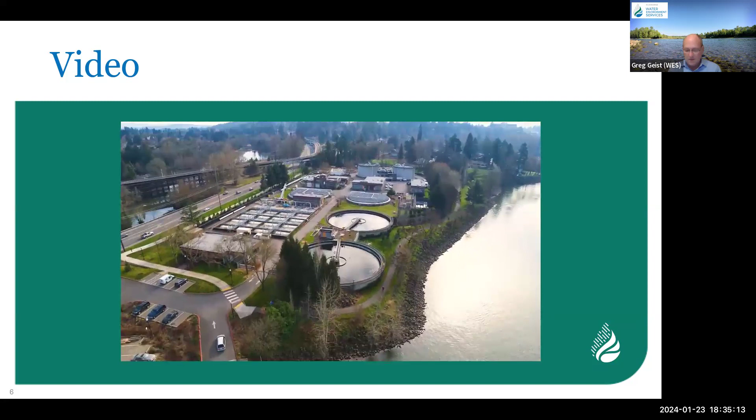We don't call our facilities sewage treatment plants. We call them water resource recovery facilities because that's what they do. They make clean water, that's very important. They also make energy, electricity, with what goes down your toilet. And we make fertilizer that we can use out on agricultural fields. People expect clean water, they have high expectations around that. And the idea that we can help protect that, and that's our job, how lucky can a guy get to have that be your job?

All right, thank you. I do feel very grateful to be able to do what we do for the community. I want to read our vision. We have a vision and a mission statement for WES. Our vision is to be a collaborative partner in building a resilient clean water future where all people benefit and rivers thrive. As I mentioned in the video, it's all about connecting with the community and understanding what their needs are and what their values are. I'll go ahead and let you read the mission statement.

But as I alluded to in the video, we don't just do wastewater. This is a wastewater conveyance project, which means pipes in the ground that get wastewater to our treatment plant for it to be treated and do all the great things that we do there. But we also do habitat restoration in our community and manage stormwater runoff.

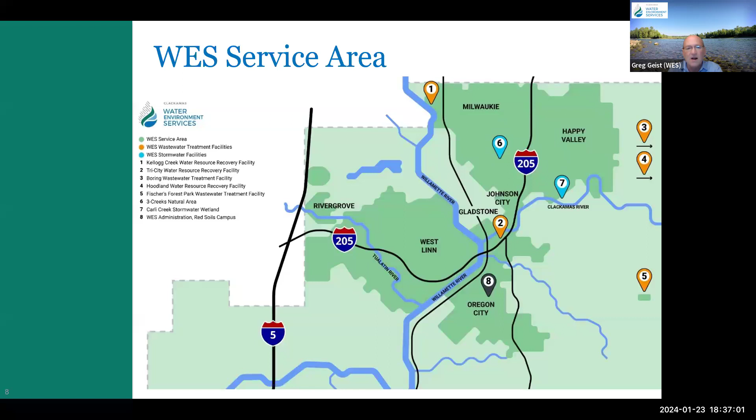Next slide, please. And this is the area that we serve. This is our service area in the dark green there. Everything from Milwaukie out to the far reaches of Happy Valley and south down to Oregon City, West Linn, and Gladstone. We serve about 200,000 people, and we treat about 7 billion gallons of wastewater every year. It's pretty remarkable.

Next slide, please. So the project that we're talking about tonight, I think we need to give it some context. It's one project of many that we are working on. We base our projects on plans. As you can see, since 2017, we've done a number of what we call master plans or facilities plans that take a look at our facilities, the condition and the need for future expansion, amongst other things. We develop a 5-year capital improvement plan, or CIP, based on the needs identified in those various plans. This particular project came from our 2019 sanitary system master plan that identified future growth in Happy Valley, as well as some older infrastructure that needs to be replaced. And so that's what we're proposing with this project.

Next slide, please. And again, as I mentioned, our 5-year capital improvement plan, which is really the infrastructure projects that we intend to construct, build, and operate over the next 5 years, has a couple different components. Part of it is capacity. This project is about future growth, but the other part is reliability. When you look at the overall amount of money that we're going to spend over the next 5 years, between the projects that deal with capacity, that's about 40% of our allocated expenses, and the reliability piece is about 60%. So we have infrastructure that's been in place for many, many decades, and that reliability piece is also very important.

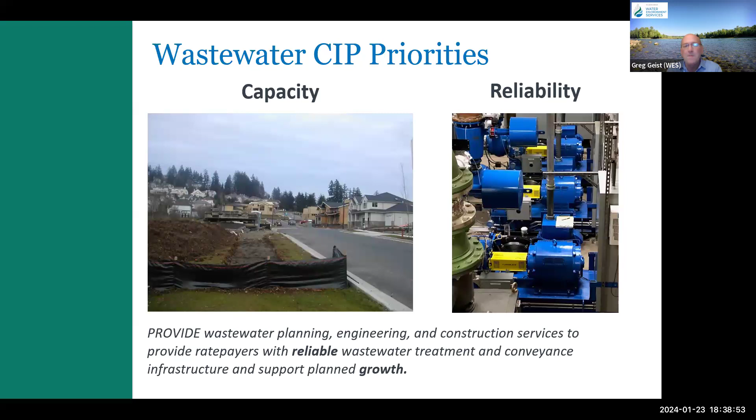Next slide, please. And along those lines, we do a lot of thoughtful planning. We have our 5-year capital improvement plan, you can see the bubble on the left. We also have an annual capital budget. We have a long-term financial plan and a rate forecast. Our goal is to have reasonable and predictable rate increases over time in order to provide both the reliability and the future capacity that we are trying to provide.

And again, if you look, we have stakeholder input loops throughout our process. We have the Board of County Commissioners, which is the governing body of Water Environment Services. They're the ones that approve our 5-year capital improvement plan, and they approve our annual budget and rates that are necessary to fund the overall capital improvement plan, and this project in particular. Next slide, and I'll hand it off to Jeff to talk more about the details of the project. Thank you very much, Greg. Next slide.

So we'll start off with what is the Outfall project? The treated water from the Tri-City Water Resource Recovery Facility is called effluent. This treated water, or effluent, is sent to the Willamette River through an outfall pipeline. This pipeline has diffusers at the discharge location that are designed to maximize mixing of our plant water into the river. This mixing and dilution is carefully engineered as an important component to meeting the state water quality standards, helping improve our rivers for boating, swimming, fishing, and aquatic resources. As someone who enjoys exploring our rivers, I think this is very important for me personally, and also a very important aspect of this project. The project overall will consist of building a 90-inch diameter, which is 7.5 feet.

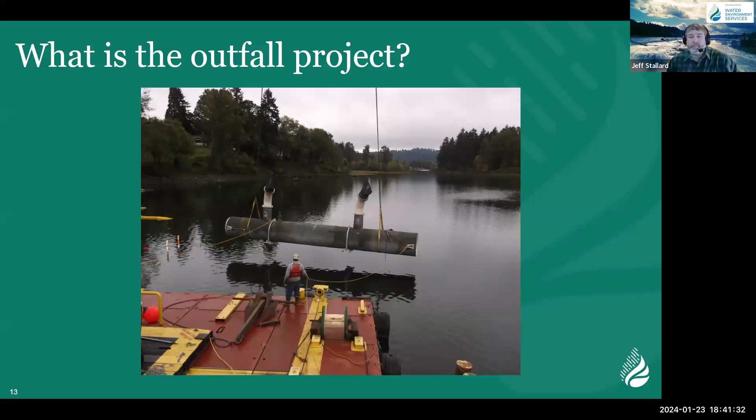So why is the outfall project needed? Our existing outfall was constructed in 1984 when the original plant was built. During the recent update to the sanitary sewer system master plan, a hydraulic model was created to evaluate the piping in our collection system and project flows we could expect at our Tri-City facility. As part of that plan completed in 2019, the need for a new outfall pipeline was identified, as our existing outfall is at capacity during peak wet weather events.

At the conclusion of this project, WES will have 2 outfalls to the Willamette River. The new outfall will become WES's primary, as the selected location provides a deeper spot in the river for better mixing of our effluent. The existing outfall, still in great condition, will remain in place for use during significant wet weather events when we need extra capacity. This provides resiliency and redundancy to our outfalls, which is a luxury for our facility.

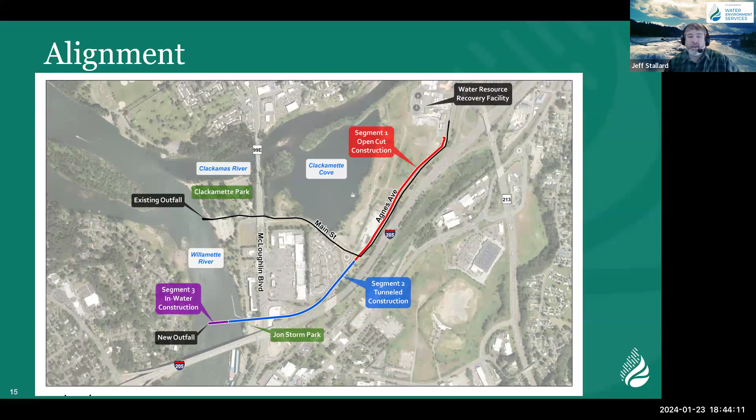Before we get going talking about all the segments of the outfall, I want to mention some information on our Tri-City Water Resource Recovery Facility. The Tri-City facility was built in 1984 and treats wastewater flows from Gladstone, Oregon City, West Linn, Happy Valley, and other areas of unincorporated Clackamas County. There was a major expansion completed in 2012, which added capacity using a membrane bioreactor.

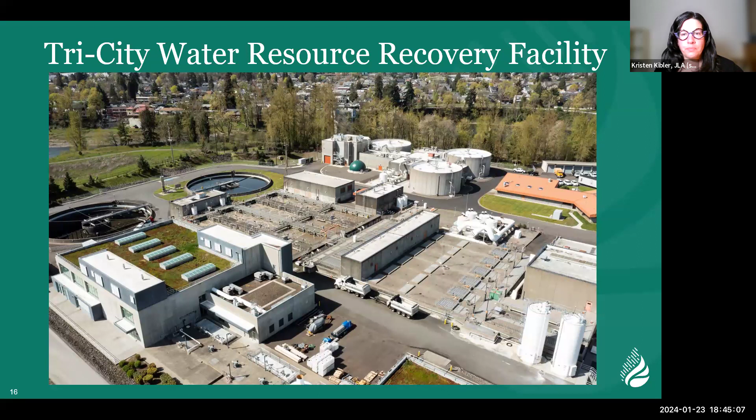Thanks, Jeff. Thanks, Kristen. So yeah, I wanted to talk a little bit about these 3 segments. We split the alignment up in these 3 segments, mostly based on construction approach. The first segment is an open cut construction. The second segment is a tunneled construction. And the third segment is an in-water construction.

So I'll talk first about this open cut construction. The open cut segment consists of construction in Agnes Avenue, and it's going to require careful placement of a new 90-inch fiberglass reinforced pipe on the edge of the old Rossman landfill and adjacent to 2 large diameter pipelines in the alignment that you see here on the picture.

The 2 large diameter pipes include the existing outfall and the existing force main that need to stay in operation during construction. So the contractor is going to have to protect the existing lines from potential settlement or movement during construction, and they'll be using shoring.

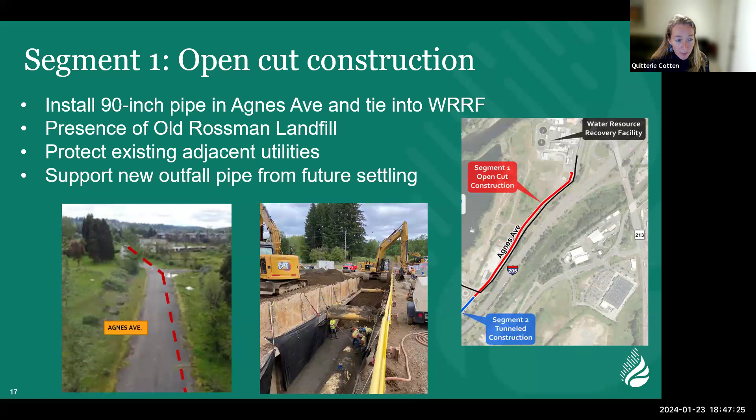I'm going to talk a little bit about the tunneled construction. As shown on the blue line on the figure, the tunneled construction starts near the roundabout at Main Street and ends in the Willamette River at segment 3, where the diffuser starts.

The alignment of the outfall navigates down a tight, busy corridor between Main Street, I-205 and its on and off ramps, and then residential property, a hotel, shopping area, and Jon Storm Park. So the only way for this outfall to get to the river is for this segment to be constructed with a trenchless approach. By hiring a specialized trenchless contractor, we ensured that the design led to a constructible approach.

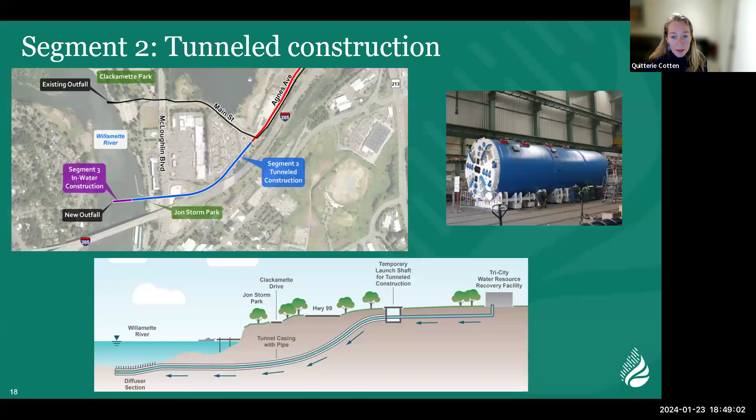The trenchless construction will use a large microtunnel boring machine, depicted here, 108 inches in diameter. It will allow us to get from the end of segment 1 to the in-water portion with a horizontal and vertical curve, as shown on the plan and profile on this slide. This will allow the alignment to be done in one stretch without having shafts in the middle of the alignment.

The project required significant stakeholder coordination with ODOT, given all the crossings we discussed, with the on-ramps and off-ramps, and also because concurrently to this project is the Abernethy I-205 Bridge widening project. Other stakeholders were also involved.

Over these past few years, we talked with property owners along the alignment, the tribes, and then the City of Oregon City and the federal and state permitting agencies for this project.

The tunnel construction avoids major highways like I-205 and Highway 99. It also avoids main roads like Clackamette Drive and Main Street, and it avoids underground utilities, residential areas, and cultural resources. Finally, the project avoids impacts to Jon Storm Park by going under the park rather than open cutting the shoreline.

The tunneling will minimize the duration of the in-water work by extending the tunnel section all the way to the start of the diffuser in the Willamette River. The microtunnel boring machine will be able to navigate through challenging ground conditions deep below the surface, while minimizing impacts to this busy corridor.

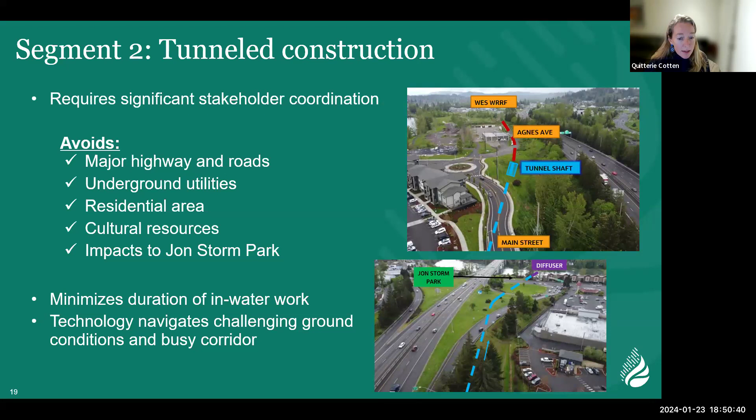The shaft will also allow the contractor to feed individual segments of pipe that will be pushed through the tunnel from this entrance portal. Once the microtunnel boring machine reaches the location of the diffuser in the Willamette River, it'll be retrieved by a marine contractor from the bottom of the river and lifted onto a barge. The tunneled installation is anticipated to take 7 months, including excavation of this entrance shaft.

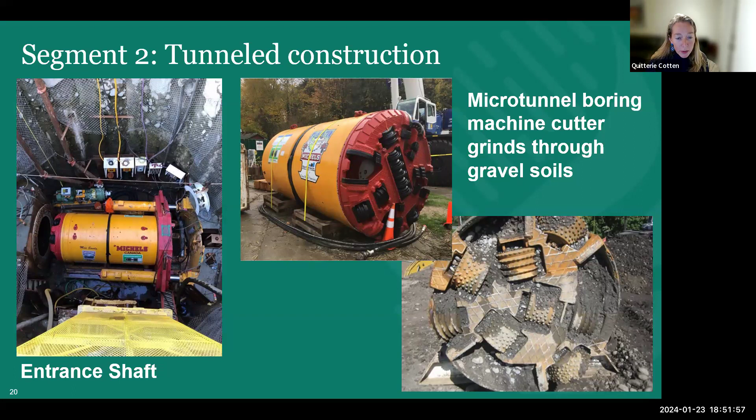There's a picture on the slide to the right that shows the type of material we anticipate finding in the alignment. This microtunnel boring machine cutter will be able to grind through these gravel soils.

Finally, the last segment, which is really important because it will install the diffuser, will be constructed in the Willamette River. The in-water construction is permitted to occur only during the in-water work window, which in this reach of the Willamette River spans from July 1st through October 31st.

Those valves stick up slightly from the bottom of the river, and they passively open to allow flow from the outfall pipe to mix into the river.

The in-water construction will be completed by an experienced marine contractor, who will retrieve the microtunnel boring machine we talked about earlier during the first in-water work period this year in 2024. Then the contractor will come back next year during the 2025 in-water work period to install the 150-foot long diffuser.

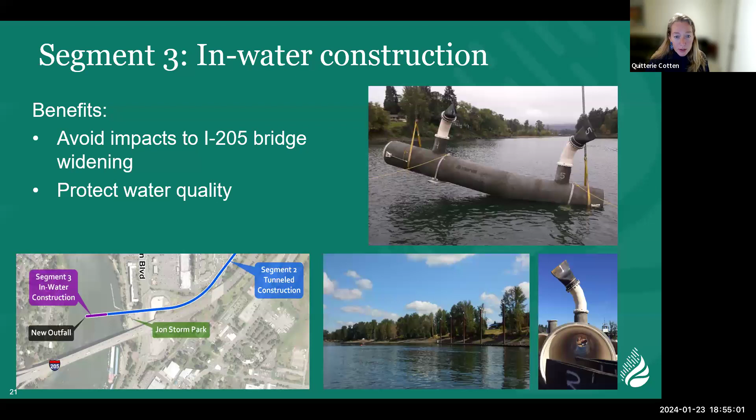Work began on this project in 2019 with the routing study, followed quickly by preliminary design. Due to the unique geology for this corridor, we decided to deliver this project using a progressive design build delivery model, which brings the contractor on board during design and helps us dive into construction means and methods and manage risk.

A contractor was selected in the fall of 2022, and construction will start this spring and be completed in October of 2025, when our new outfall will be brought online and begin to serve as our primary outfall.

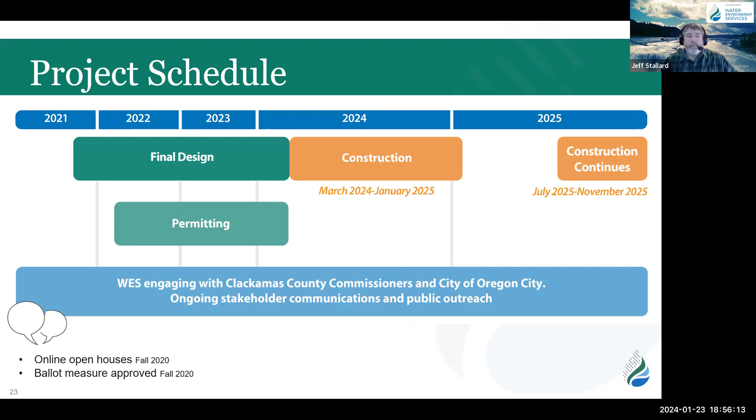Next slide. So, what's coming soon? We've talked about the overall construction schedule, but I wanted to note a few activities occurring in just the coming months.

Michels, our tunneling contractor, will be moving onto the site. They started dropping tools this week and will continue moving into the construction area over the coming month. Once erosion control permits are in hand and received by DEQ, work will begin to prepare the staging area adjacent to the Tri-City Water Resource Recovery Facility, where these 90-inch pipes will be delivered before they're dropped into the tunnel.

We're expecting 10-foot sections of pipe. Given the weight of these pipes, you basically get 1 segment of 10-foot pipe per truckload, and there are over 200 segments to be delivered to our facility. It'll be exciting seeing that come onto the site.

Construction of the tunnel launch shaft will begin in March, with tunneling to begin in July, and our machine should reach its destination in the Willamette River in October, where it will be lifted out of the river and put on a barge. Construction of segment 1, the open cut work, is anticipated to commence in May of this year and run to the end of the year, with reconstruction of Agnes occurring this year.

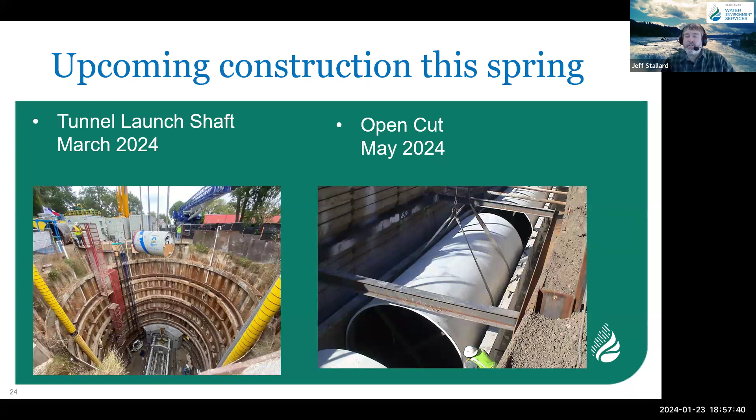And with that, next slide, I'll turn it over to Kristen.